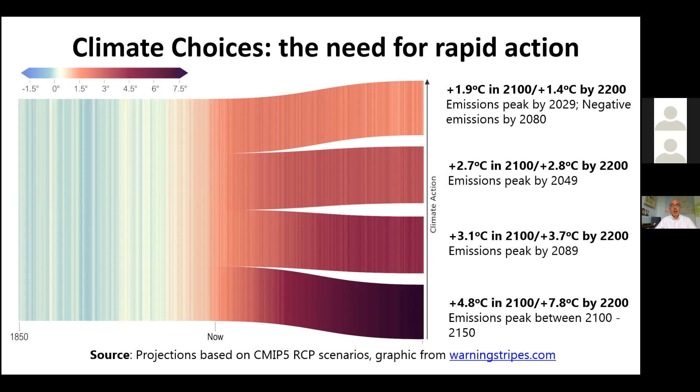So the starting point is, why are we doing this? Essentially, climate change is the driver. We need to take rapid action to address rising CO2 levels in the atmosphere, and if we don't make things happen fairly quickly, the alternatives aren't looking very promising. Within the UK and many other countries, there's been a lot of work on policy and setting targets. One real tipping point recently was the publication of the Committee on Climate Change Net Zero report last May, which changed the whole emphasis from delivering 80% reduction by 2050 to delivering 100%. For Scotland, they actually brought the target forward to 2045.

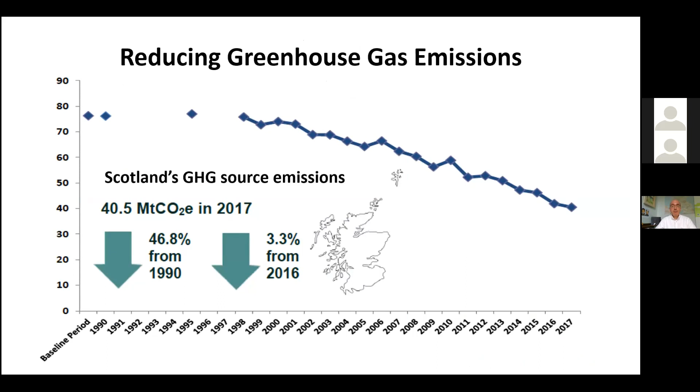The key thing is that the CCC advises you need energy efficiency, renewables, and carbon capture if you're going to stand any chance of reducing greenhouse gas emissions from where we are now. We've made great progress since the 1990 baseline through to 2045, 2050, where essentially we need to have net zero emissions. A lot of the progress already made has been with the decarbonisation of electricity.

I use this graph to illustrate how electricity has made substantial progress towards decarbonisation of supply over the past 30 to 40 years—recently the transition from coal to gas, and in the past decade or so, more renewable generation. This chart shows the trend, but a couple of numbers: if you use natural gas for producing electricity with CCGT, it's about 450 grams per kilowatt hour. If you burn gas for heat, it's about 200. But the average for Scottish electricity generation at the moment is probably now well under 50 grams per kilowatt hour. So a lot of progress.

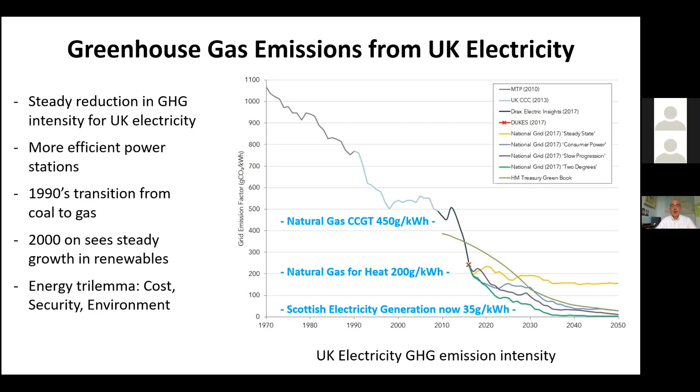This is underpinned by some pretty significant changes—closing down all of the coal power stations, so Longannet closed in March 2016—and a lot of renewables being installed. You can see from this chart the growth in onshore wind has been massive over the past 10 years or so. What we think will happen next is that Scotland will reach its 100% renewables target.

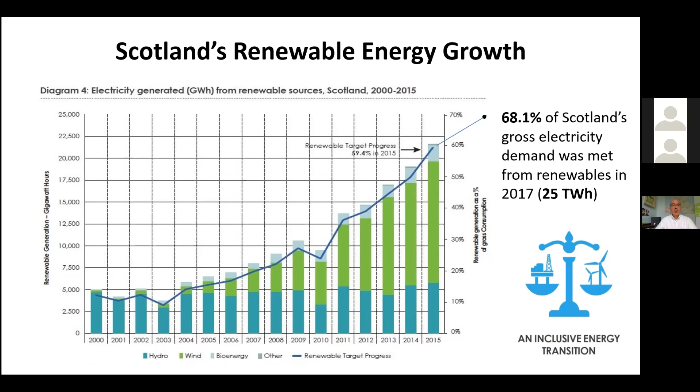But that's just for the electricity sector. Beyond that, it's about installing yet more renewables to help decarbonise other parts of the energy system—electricity is just one part of the total. Electricity is about a quarter of Scottish final energy demand, and if we look at heat, that's over half. So that's one of the biggest challenges, and transport of course has to be considered as well.

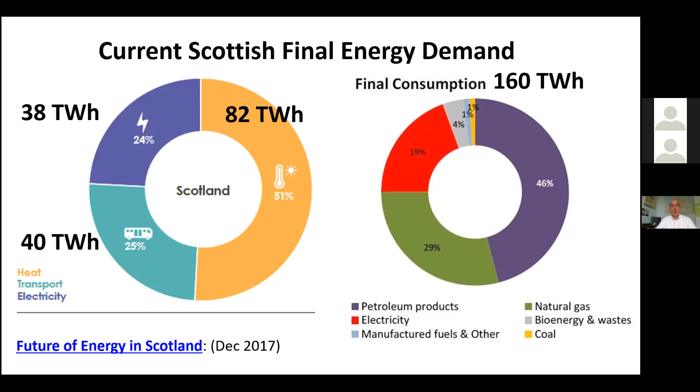So what I'd like to do now is take you on a whistle-stop tour around Scotland and some of the locations where we've got projects underway, starting today right at the top in Orkney.

Because often the grid doesn't have the capacity to actually move the electricity around. This is where the use of hydrogen has been central to some of the projects in Orkney. There are community wind turbines on the islands of Eday in the very north, and Shapinsay, just north of Kirkwall, producing electricity. Often it's curtailed because of the grid issues, and that's now being used in electrolyzers to actually produce hydrogen. That hydrogen can then be moved to where you actually want it, and when you store it in cylinders, that gives you some flexibility in production, supply, and demand.

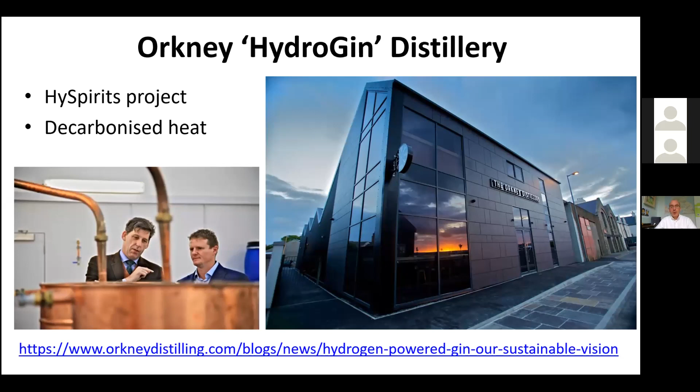And the one I really like, a project underway at the moment, is the HyFlyer project, a 6-seater electric fuel cell plane using hydrogen as the main fuel, undergoing tests firstly at Cranfield, but due to come up to Orkney for some endurance tests very shortly. This is an example of where hydrogen can decarbonise what people call hard to treat sectors: heavy duty transport, aviation, shipping and trains, among others.

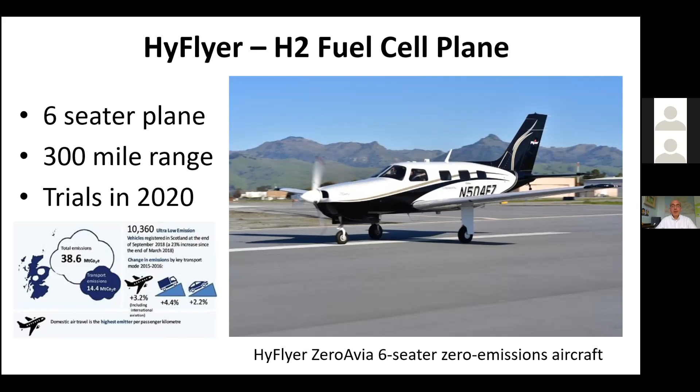Moving down to Methil, just across from Edinburgh across the Forth, the Hydrogen Office was actually first opened back in 2011. Since then, it's been home to a number of projects, the most recent being the Levenmouth project, where they installed hydrogen refuelling and brought in a fleet of hydrogen vehicles.

I think Alistair will talk about this in more detail, so I won't talk about it very long, but absolutely critical in terms of the next steps with hydrogen for heat is understanding how this might be acceptable to the consumer. This is exactly what the H100 project is going to do - it will give people the choice to go between either natural gas or move across to hydrogen for their domestic heating. Just as background, the Fife Hydrogen Coast has a lot of other opportunities around here.

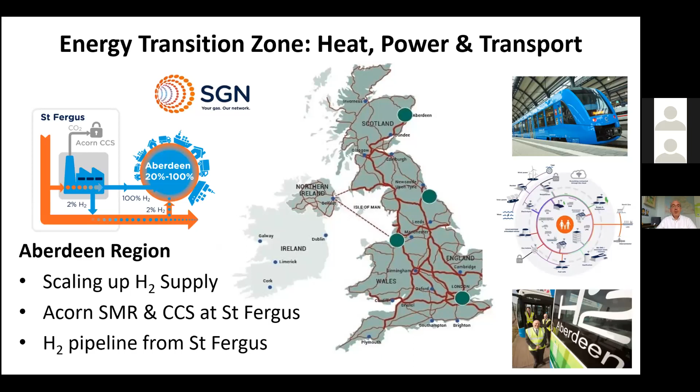And the energy transition zone, there are also projects, and Alistair may cover these, around scaling up the supply of hydrogen to Aberdeen, linking it to the Acorn project to produce blue hydrogen. Blue hydrogen is essentially using natural gas with carbon capture to make hydrogen, with a pipeline coming from St Fergus down to Aberdeen. Acorn, very briefly, is one of the key projects in the UK for carbon capture, linked to the St Fergus plant.

St Fergus is where a lot of the gas comes onshore and is cleaned up before going into the national grid. But using the assets that already exist, some of the pipelines, to take the carbon dioxide from the steam methane reformer and transport it offshore and sequester it in some of the sandstone formations that used to hold oil or gas, which can now be used for storing CO2 safely for long periods.

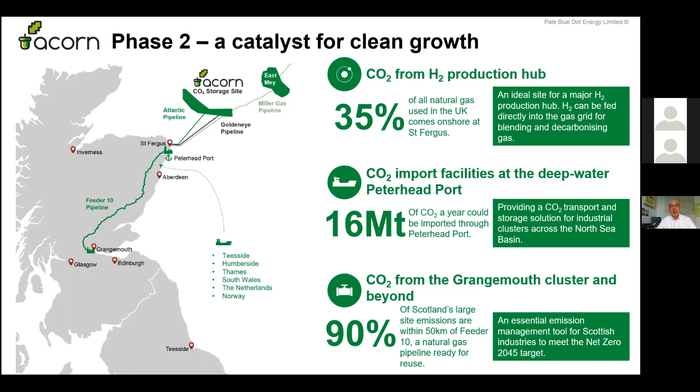As well as using the CO2 from St Fergus from the SMR, the plan is also to open it up and bring in the option for CO2 imports from other parts of the UK, which will help other projects rapidly scale up and become part of the whole transition to net zero. So shipping for the CO2 is the starting point, going into Peterhead, then the pipeline to take it out to the sequestration sites.

And the great thing is a lot of the assets already exist. It's a question of whether they can be repurposed for new duties, with pipelines that could carry hydrogen or carbon dioxide. And the big question now is, how do things develop going forward?

So I'd just like to leave you with a few thoughts about some of the scale and the potential that we've actually got in Scotland. A lot of this comes back to renewables as the source of energy, essentially starting to replace the oil and gas that Scotland has produced a lot of over the past 40 or 50 years. And the opportunity for offshore wind is looking really quite stunning.

The UK is actually leading in one area, the deployment of offshore wind. It's the country with the most offshore wind installed. The plan is that by 2030, it's about 40 gigawatts of offshore wind in UK waters.

Just to put it in perspective, some of the recent estimates on offshore wind potential indicate that Scotland has the potential for a capacity of something like 735 gigawatts of offshore wind. So an absolutely massive offshore wind potential, more than Scotland needs, a big chunk of what the UK would need.

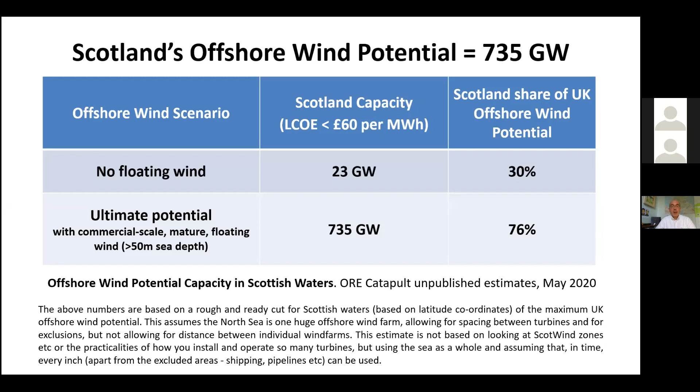And this opens up the potential for also feeding into European markets, the production and supply of green hydrogen from offshore wind into UK and offshore European markets. And how would you do that? Well, this is where the pipelines become really central to how you develop this.

So the pipelines, which might at the moment be used for oil and gas coming onshore at St Fergus, could either be used for CO2 or could potentially be used for hydrogen. So if you're producing the hydrogen offshore, it can then come in and start to be part of the decarbonisation, not just of the Aberdeen region, but also Scotland and the rest of the UK.

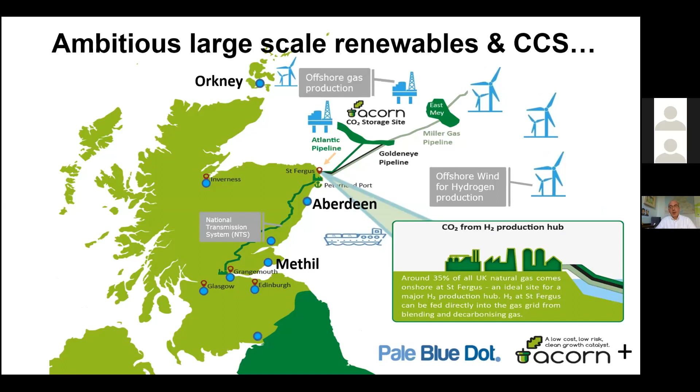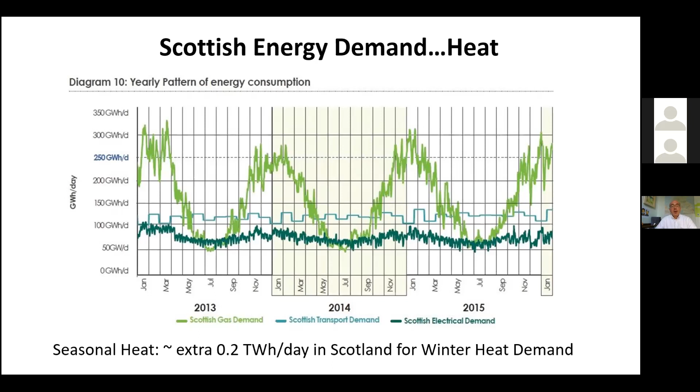So if we're going to do this at scale, if we're going to meet the net zero targets, we'll also need to think about how we tackle heat. Just as a couple of parting slides, seasonal heat for Scotland could need an extra 0.2, a quarter of a terawatt hour per day for winter heat demand. If you don't have the flexibility in renewables generation, how do you meet it?

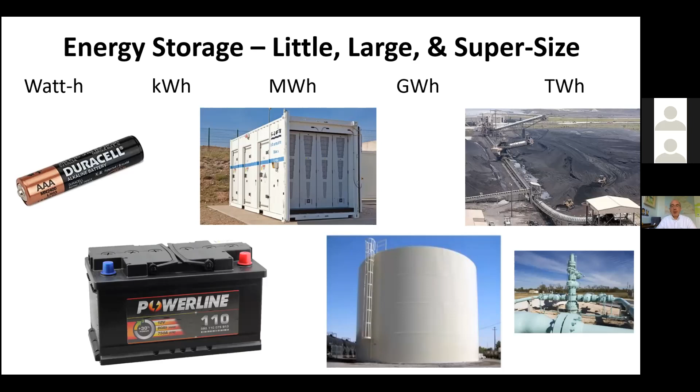Well, the good news is there are technologies out there for energy storage. This is just to give you an idea, starting from a small pen battery, going through larger and larger batteries, up to traditional liquid fuel storage in big onshore storage tanks, coal heaps at the back of power stations, but then also the potential for storing in geological structures such as salt caverns. The bottom right picture is actually of the wellhead at Spindletop in the States.

Salt caverns are already used in the UK, East Yorkshire and Cheshire are the two main areas. There are other areas with potential suitable salt. A recent BGS report indicates there could be 1,000 terawatt hours of storage potential within UK salt formations. One large salt cavern can store up to about a quarter of a terawatt hour as hydrogen gas, so if you've got lots of caverns, the potential is for lots of storage. Salt caverns are a proven technology, they exist already.

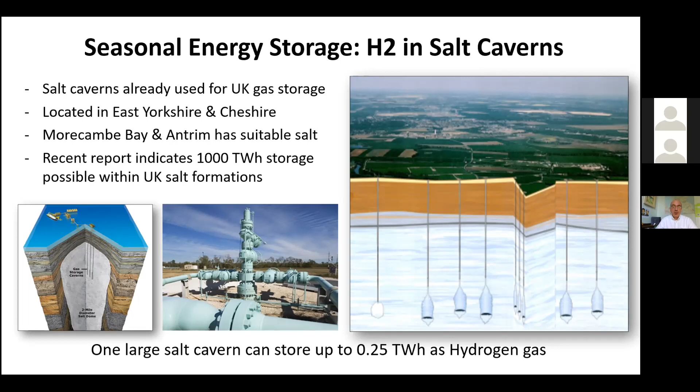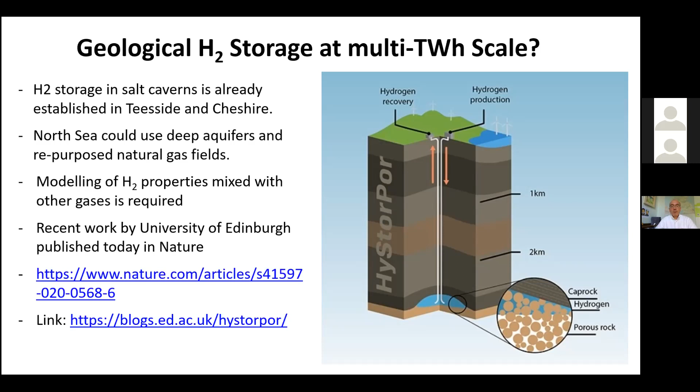The big question now is, can we use geological storage in old depleted gas wells? There's work underway at the moment with projects like HyStorPor at the University of Edinburgh, and other work overseas to see if these geological assets can be repurposed for hydrogen storage. The jury's still out on that one, but if it's possible, that brings in multi-terawatt hour capacity, in the same way as Rough storage, which could store up to about 30 terawatt hours of natural gas. If we used Rough for hydrogen, you'd probably be able to store about 10 terawatt hours of hydrogen in that same field. Again, the infrastructure is key to making this all work properly.

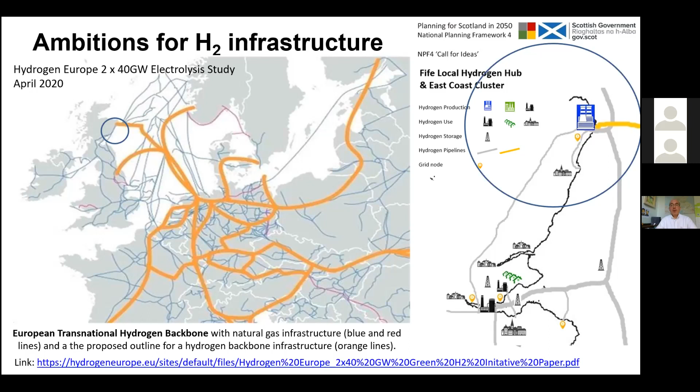There's a report out in April by Hydrogen Europe, the two times forty gigawatt study, which has a great schematic, figure 7 if you're looking for it, showing the European hydrogen backbone and how that might join together parts of Europe that can produce hydrogen and other parts which would have the demand. Early demand is likely to be in places like the Netherlands and Germany for industrial decarbonisation. Within Scotland, the big question now is, if we start to look at this backbone, how do you then connect it into the local supply points? This could be islands such as the Western Isles, Orkney and Shetland, or indeed some of the port areas. So Aberdeen and Cromarty could also be very interesting for this opportunity.

So just to wrap up, this was really just about giving you an overview of the reasons things are happening, the projects underway in Scotland. What I'd like to emphasise is the early projects have helped us learn a lot. We're now moving from learning by doing to actually leading by example, with larger projects such as H100, and scaling up the offshore wind hydrogen opportunities.

But to make this work as an economy, we need hydrogen supply, we need the infrastructure such as pipelines, and we need the demand. Hydrogen pipelines look like they're going to be the most cost-effective approach to energy transmission at this very large scale, and linking it into storage will be critical for making the whole system work.

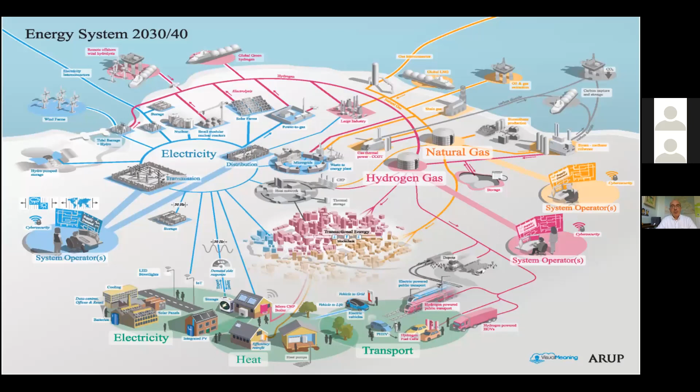So building the hydrogen economy, next steps: we need to scale up, and we need the green hydrogen from renewables and the blue hydrogen from steam methane reform with carbon capture. With all of that, we'll actually be in a good place to achieve this transformation to the energy system we want to have, which will in turn deliver net zero. Thank you very much for listening.

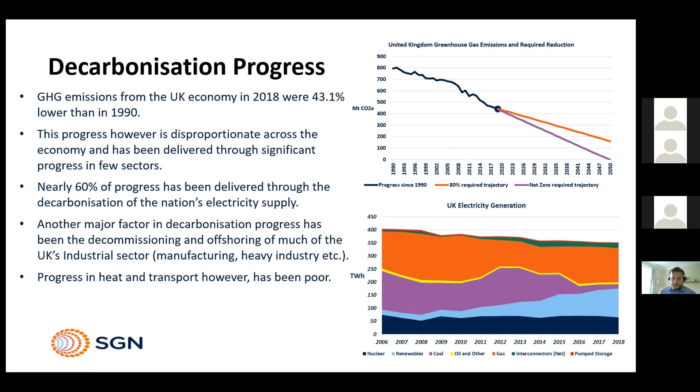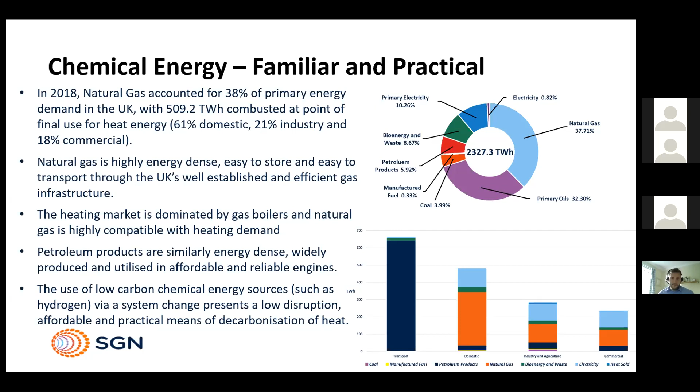So if we convert our networks and enable that change, it does provide a route to market for hydrogen producers. The difficulty here is basically coordinating the build out of hydrogen production, and also coordinating the conversion of the networks and the conversion of customers all at once. So everyone has to be on the same pathway here.

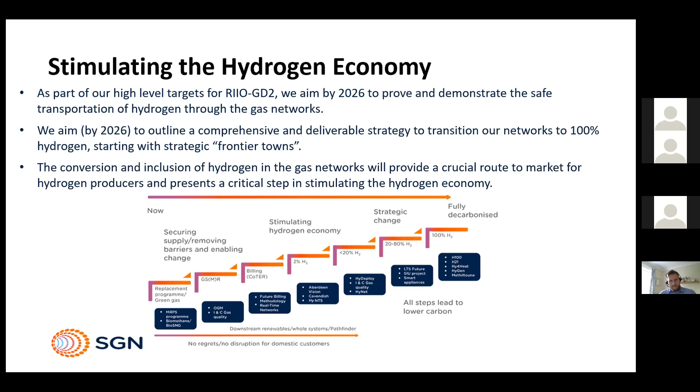I've kind of just focused on Scotland here, but we do have similar projects in the southeast. The diagram shows some of it's a little dated now, but it shows the range of projects we're looking to achieve. And I've highlighted two of them.

Our NIC bid for that was submitted about a month ago now, so we're going through the process of answering questions from Ofgem.

The second project I've highlighted is our LTS Futures project, which is looking at the repurposing and revalidation of the transmission pipelines, the LTS pipelines, for hydrogen and also for CO2. We've got these assets in the ground already, so we're looking at how we're going to repurpose them, because if you have to lay a whole new network, the picture changes a bit. So it's important we're able to do that.

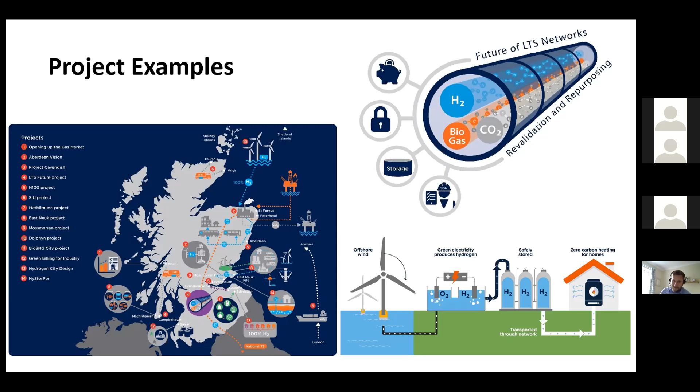So where this fits in with the oil and gas industry, and also with industry itself, the advantage of hydrogen is it almost allows the oil and gas industry to keep doing what it's doing, but do so with net zero energy.

The oil and gas industry brings energy to people from faraway locations because it's so energy dense and easy to transport, as opposed to the electricity generation model where you build, say, a wind farm off the coast of a city and supply it there and then. So it's using local energy supplies as opposed to bringing energy. Hydrogen allows you to reach further out and take that energy and bring it to people, and it's a route to repurpose much of the supply chain.

You'll all know how important the oil and gas sector is to the UK economy. It supports hundreds of thousands of jobs, and a lot of those jobs are highly concentrated in certain cities such as Aberdeen. So we're working with those supply chains to ensure that everyone's on the same page and everyone's on the same timeline to develop not only hydrogen production but carbon capture capabilities, and also expanding it to green hydrogen, which I'll come on to soon.

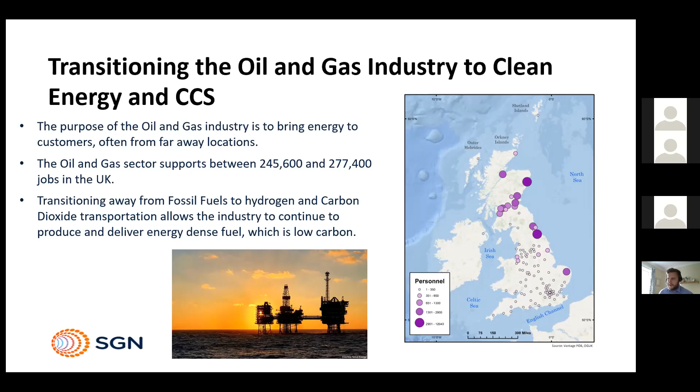Coming on to industrial clusters: these are areas of highly concentrated industrial activity and energy demand. They've got excellent supporting infrastructure, natural gas supply chains, energy supplies, and they're very concentrated areas of emissions as well. So actually, if you target them with CCS, you can get quite a quick result there.

Decarbonising industrial clusters is quite aligned with government strategy. As part of the green recovery, the UK government have already indicated investment of 139 million towards developing hydrogen and CCS at areas of heavy industry and manufacturing. The 6 largest industrial clusters: 4 of them are in England, one in Scotland, and one in Wales.

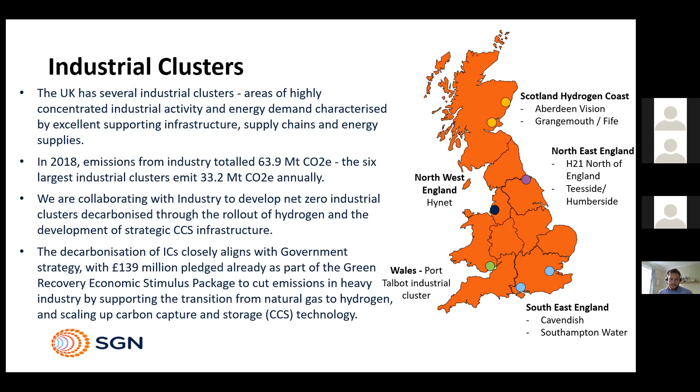For us, targeting industrial clusters is a good way to stimulate demand. We saw this diagram earlier on, but I'm just focusing on Scotland here - we also have our Southampton water project, which is targeting the industrial cluster at Southampton, and then Project Cavendish, which is targeting the southeast, the Kent area, with hydrogen and CCS there.

We're looking at running a parallel, 100% hydrogen pipeline to all the offtakes, or most of the offtakes in Scotland, to stimulate the hydrogen economy. You need to bring 100% hydrogen to as many people as you possibly can, because that's the only way you're going to get cost competitiveness and actually start to scale it through economy of scale.